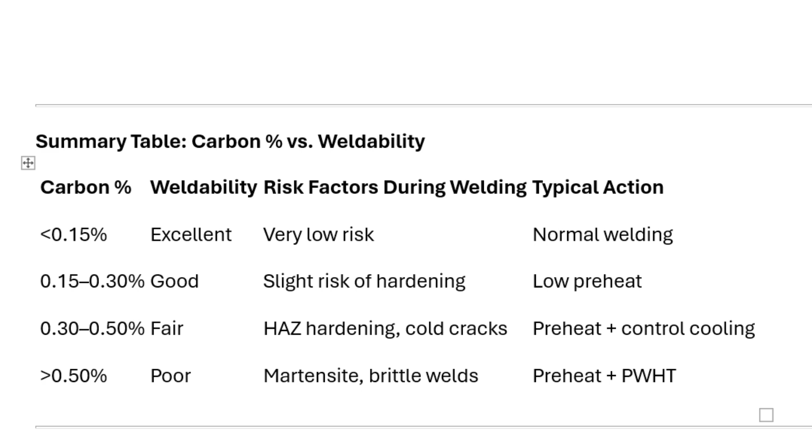So up to 0.3 or below, it's good weldability, but there is a risk of hardenability because more iron will mix with more carbon, and iron carbide is extremely hard. So you have a chance of more hardening. At the same time, you need to give some amount of preheat because welding becomes a little more difficult. Below 0.15, you don't need any of these things.

Now, 0.3 to 0.5 is not a very good condition for welding. You need preheat and many other controls. And 0.5 and above, welding is very, very difficult. Therefore, in most standards you'll find carbon percentage is limited to 0.2 or below. So more carbon, lesser weldability; more carbon, gaining strength. So beyond a certain point, to gain strength, you bring manganese. I will talk about the influence of manganese later on.

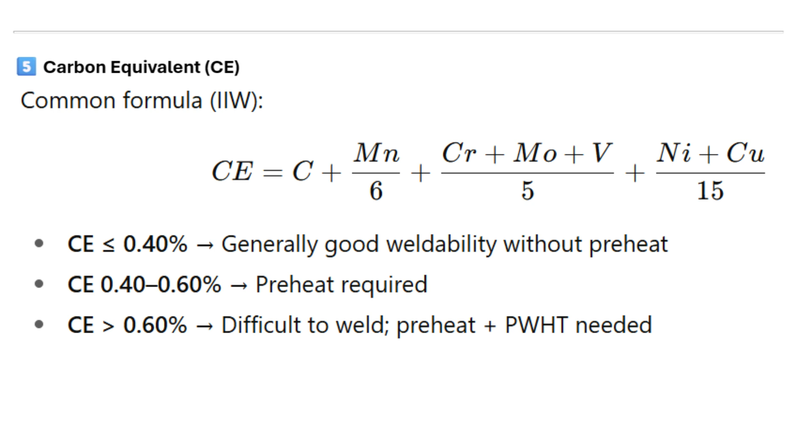Now, not only carbon has influence; many other alloying elements also influence weldability. So there is a concept of carbon equivalent, which includes the influence of other elements: manganese, chromium, molybdenum, vanadium, nickel, copper. The formula of carbon equivalent is C + Mn/6 + (Cr + Mo + V)/5 + (Ni + Cu)/15. If the carbon equivalent is less than 0.4, it is quite good in weldability.

Now I will also explain the influence of carbon on ductility and toughness. As I said, the higher the carbon, the greater the hardenability, because it also starts to form martensite. And the more hardenability, the harder the steel becomes, then it will lose ductility. Ductility is the ability to expand or stretch, and toughness is the ability to absorb shocks and impacts. So with greater hardenability, ductility and toughness will reduce. Steel becomes less tough with higher percentage of carbon.

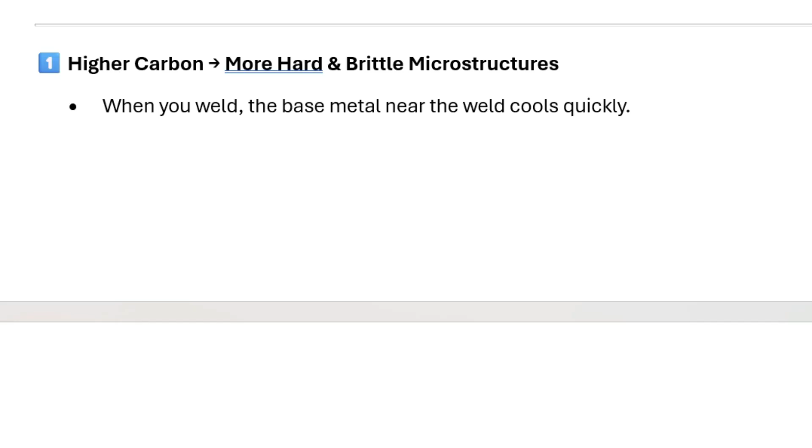What is the impact of higher carbon? Higher carbon makes a harder and more brittle microstructure, which reduces the ductility and also toughness. It is not so great for weldability beyond a certain percentage, but below that, carbon up to say 0.2, it is absolutely weldable without any impact.

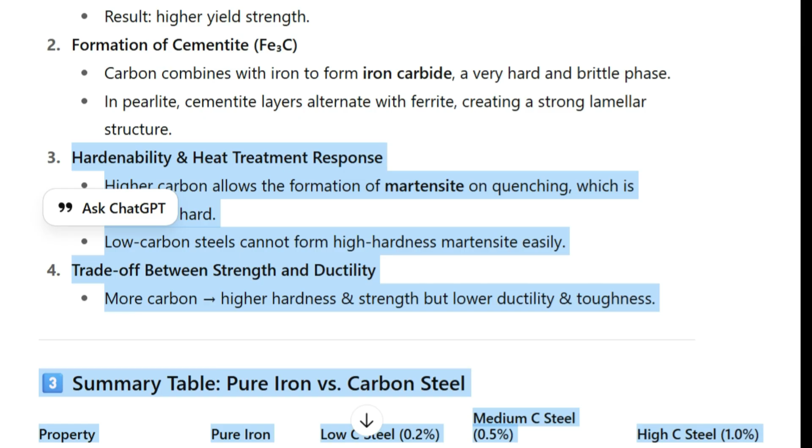Look at this table. Tensile strength: pure iron has very low strength, 200 to 250 MPa. Low carbon steel with 0.2% carbon has 350 to 450 MPa. So up to 0.2% carbon is giving so much strength. Pure iron contains almost no carbon, 0.0005% or so, very negligible. When you increase the percentage to 0.5, it goes to 600 to 800 MPa. So more carbon gives huge strength.

And high carbon steel, which is 1% or above, gives 800 to 1000 MPa. It's a big tensile strength. But see how the hardness is impacted. Hardness is 70 Brinell for iron, 100 to 150 for low carbon steel with 0.2%. With medium carbon 0.5, the hardness goes to 170 to 220 Brinell hardness number. And for high carbon, 250 to 300. So it's becoming very hard.

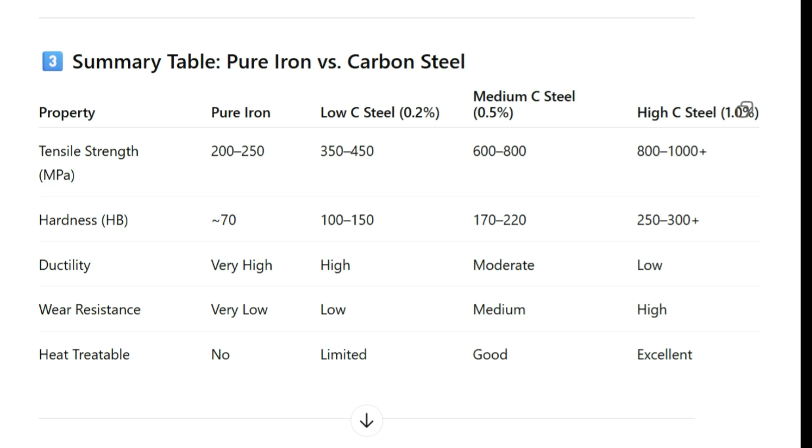Pure iron is very ductile but doesn't have much strength. Ductility is high in low carbon, moderate in medium carbon, and low in high carbon. So the strength goes up, but you lose ductility. Wear and abrasion resistance: because it is hard, high carbon steel will have higher wear resistance. Iron is lower, low carbon is low, and it increases with percentage of carbon because hardness is more. Precisely this much you should know about the impact of carbon in carbon steel.